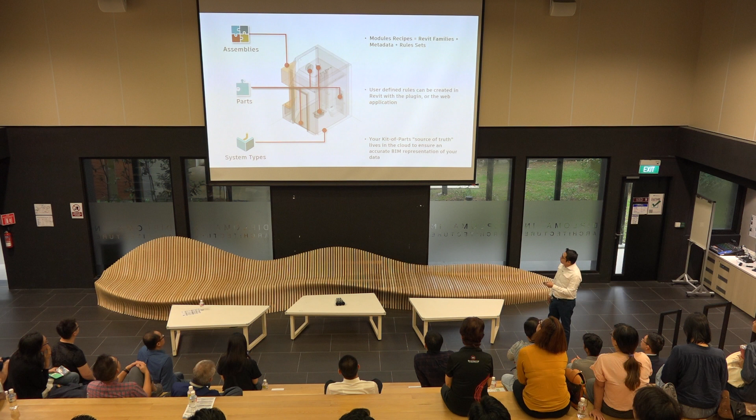There are different personas that are involved. First, you need to have your kit designer that actually creates the libraries within Revit, and then within Revit

you have your engineers, consultants, and architects actually creating those models within the Revit application. Then later on, for the manufacturer or the other downstream supply chains, they can actually use Dynamo and Project Frog to leverage the models that the architect has built.

Or what we can do here is that the manufacturing design can actually be put up front rather than downstream.

So with the kits of parts design, this is where all the cloud libraries are actually placed within Forge. And then you can actually place some rules on how it can be managed in the cloud.

So the workflow here is that if, let's say, you have your libraries within Revit, all the different types of parts, you can create assemblies here where you can actually publish this within BIM 360 and Forge.

So in the event that these libraries will be used in the Revit project, all you have to do is to simply call out those libraries.

So instead of having those RFAs locally in your servers or in your desktop machines, all the libraries that are common between the manufacturer and the consultant are actually common and synchronized through the cloud.

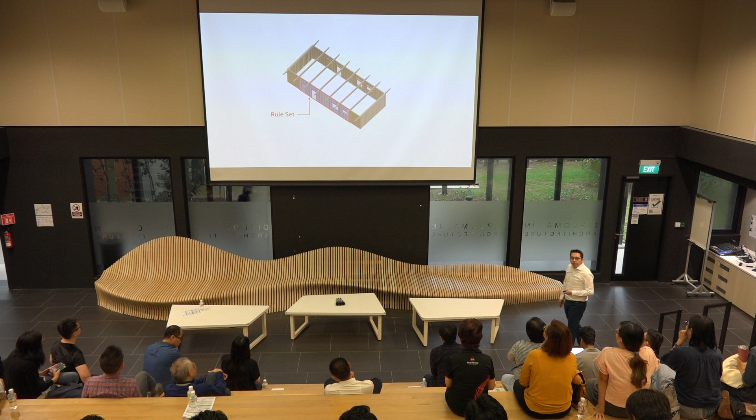So the workflow here is that first you create part sets within Project Frog, and based on the part sets, you can choose what type of parts that you would like to include in your assembly.

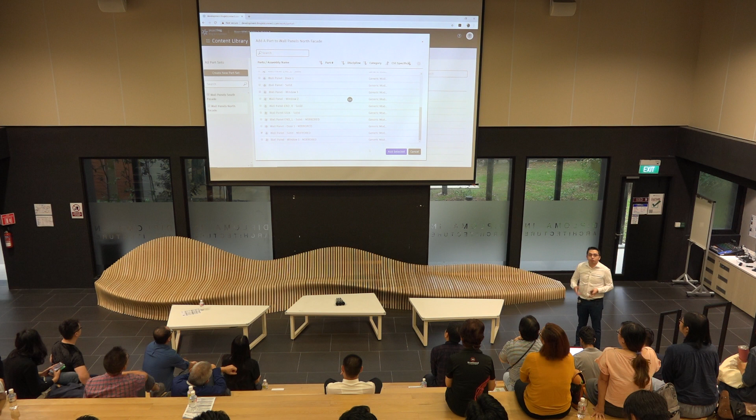So once you have done that, you can actually bring it into Revit. There's a Revit plugin here where you can actually swap a particular assembly to a different configuration.

So instead of deleting the element and adding a new wall, a new wall type, you can easily use Project Frog to actually switch that as well.

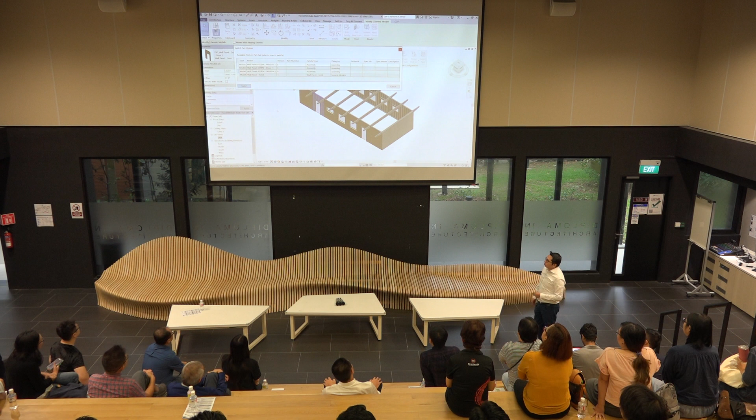So in the event that you decided to switch to a different configuration, all you have to do is select that element in Revit and then choose an equivalent manufacturable content within Project Frog.

So this one is another example. Instead of replacing, this one is more towards creation.

So you can also insert modules within Revit itself. So instead of drawing out the, let's say, LOD 100 or 200 room, what you can do is go straight away by inserting those modules within Revit.

So in the event that, let's say, you want to change a particular type, you don't have to delete everything and then replace it with a new type. With Project Frog, you can just simply capture what is the available module and then swap it with a different configuration.

So in the event that you updated your Revit project, you can always choose what type of configurations or presets you'd like to use in the project. So that's the power of Project Frog.

Instead of going through different levels of detail from Revit, you can easily swap this. So the models generated by the architect, let's say for schematic design, can easily transition faster for fabrication or construction, because these are already predefined by the contractor or the fabricator.

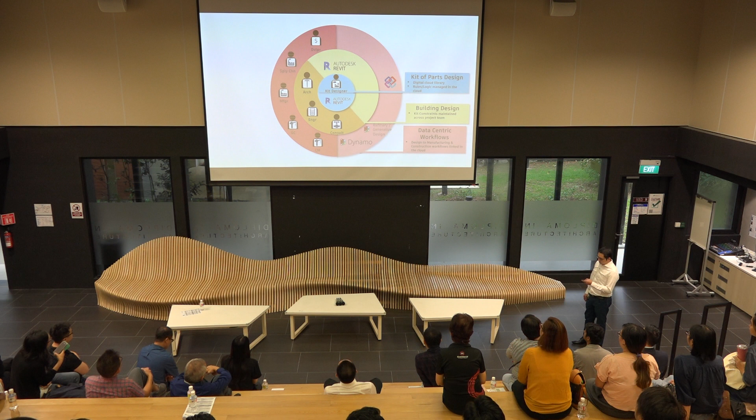The next one is the workflows from contractors and also for the manufacturers. We have design to manufacturing workflows within Project Frog. So the workflow here is that if you have a bill of material for a specific room, right?

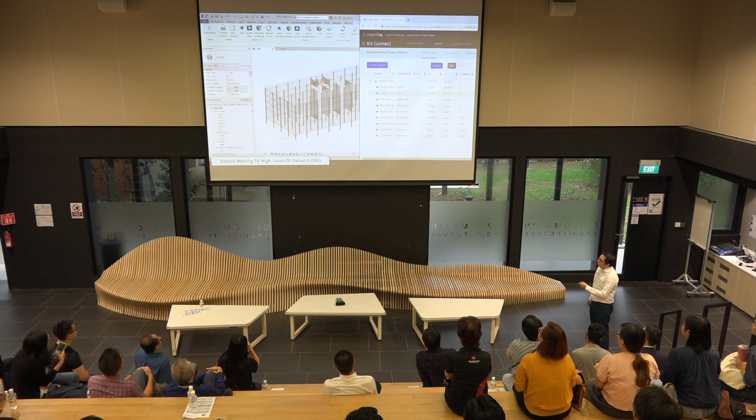You can easily swap - let's say this is a space within Revit. What you can do is simply replace this entire assembly with, let's say, a PBU or a bathroom unit. You can just simply replace that within Revit itself. Once that is created in Revit, the bill of materials within Project Frog automatically gets updated as well.

It can also integrate with Dynamo, because in the event that you have a space and want to run it across all the different common spaces, you can replace that in one go. That is where harnessing Forge, Dynamo, and the applications developed on Project Frog, marrying it into one single project.

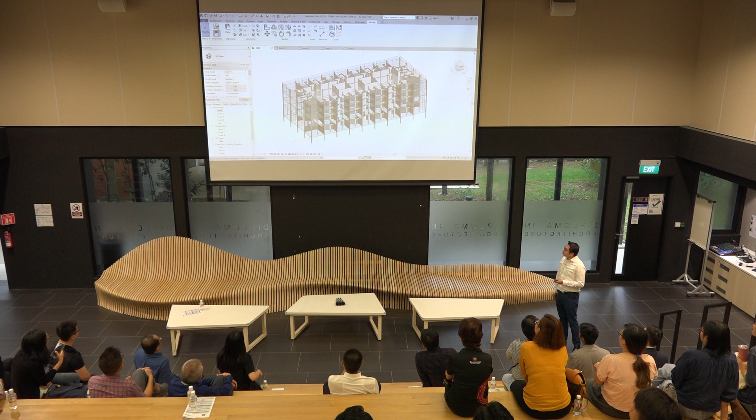For Project Frog, what we can do is have a common library between design teams and manufacturers, where you can apply your own kit of parts, where you can standardize those libraries between, let's say, a consultant and a contractor working together on a specific project.

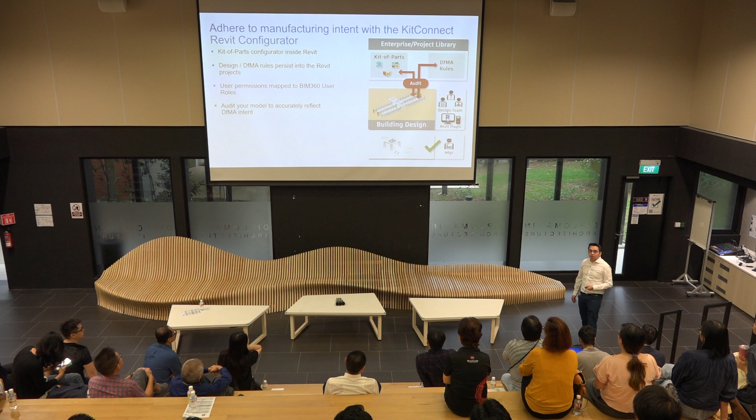The contractor can share those models to the consultant, and the consultants can bring that information within the design itself. Or on the other hand, the consultant can pass this model to a contractor, and they can automatically replace their assemblies within Revit without the need of redrawing everything. That's the challenge that we are trying to address.

At the center of Project Frog is actually the Forge application, where all the APIs available in Revit and also within BIM 360 are merged into one single application, so that all these different stakeholders in the project - the product team, project team, and even the manufacturers - are using a common data library for the entire project.